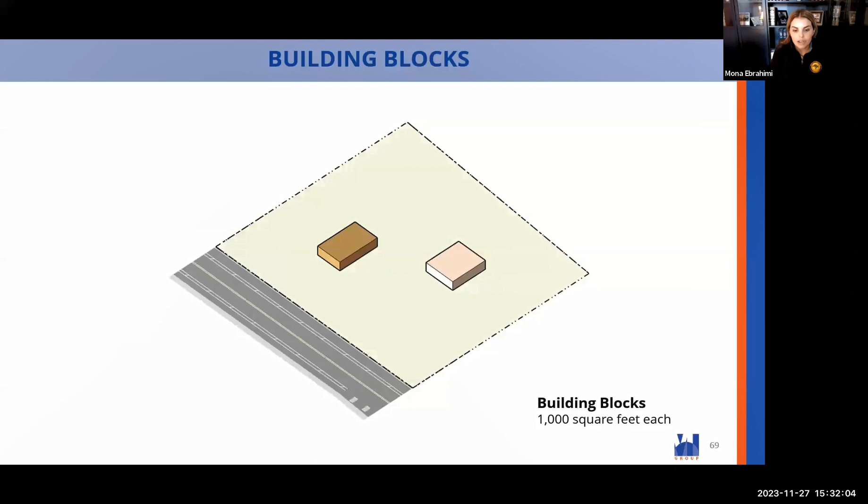So a couple of comments. Number one, your task today is to provide direction to staff to come up with some objective design standards. However, those objective design standards cannot be so onerous that they provide an unreasonable restraint on development. As an example, if you put 15 foot setbacks on every side and you can't actually build, that's not going to be upheld. The other thing, to Commissioner Polito's comment at the beginning of the meeting, trying to understand what your charge is, I want to draw everyone's attention back to the absolute need to come up with direction by the end of today's meeting so that staff can prepare those objective design criteria, because we have until January to adopt them.

And if we don't adopt them, we're subject to further penalties from HCD. The other thing that can happen is someone could submit a builder's remedy application - you don't have any objective design standards in place, so they're going to build whatever it is that they want. And the final point is that we really need to prevent exercising discretion on behalf of a developer as to what they may or may not be building. That's really not up to us to determine, and whether they actually build because of financial feasibility is really a question for another day, it's really their issue.

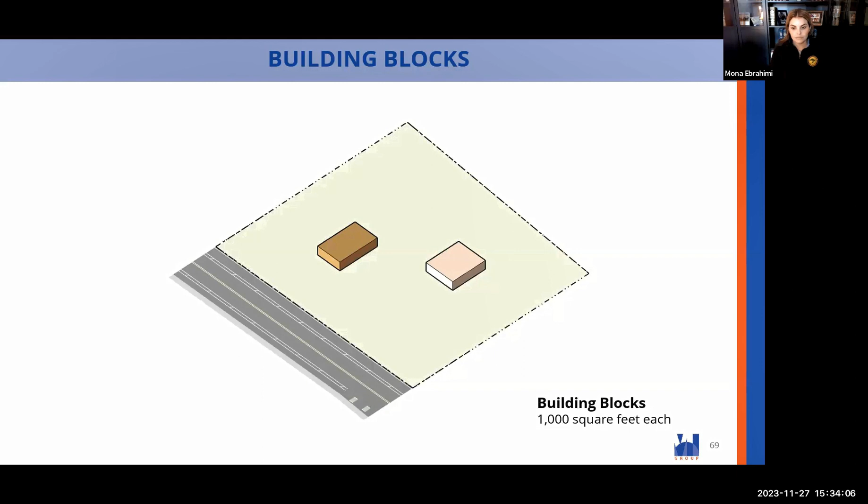So using these building blocks, we started to look at ways that they could be formulated in the big house model, looking at one big building that might have multiple ground floor entries to different units on any side, on the road side, on the back side.

In the upper left, you'll see your existing single family home standards. You do not presently have a coverage standard for residential, so that's why that's blank. In the red box on the bottom right, that changes every image because it's trying to show what this model shows. Again, this is not architecture, it's just a development yield.

So here's 13 units of 1,000 square feet each within the R1 setbacks, actually. It comes in within your R1 height limit. It has an 11% coverage, and the FAR clearly is larger than you presently allow for single family.

So for each of these models, and I have 4, we just show the model, the blocks, and then we say, well, what would happen if you put a roof on it and you tried to utilize dormers on the top floor to perhaps make the floor not as tall and allow those upper units to peek out through dormers that lift up from the roof.

Here's where you can start to see that there's multiple entries. It wouldn't be like an apartment building with one single entry to a double loaded corridor. It's supposed to look like a larger house and have these multiple units in different roof forms and such.

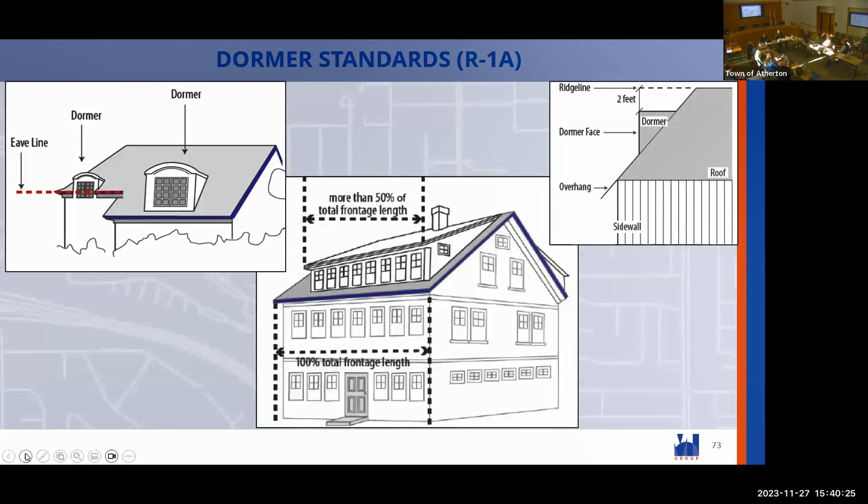Next, Anthony. So here's just an L-shaped building. Again, we're using 13 units. Base zoning would allow for 10, but we thought maybe they'll come in with a density bonus and have a few more, so we looked at how we could fit 13.

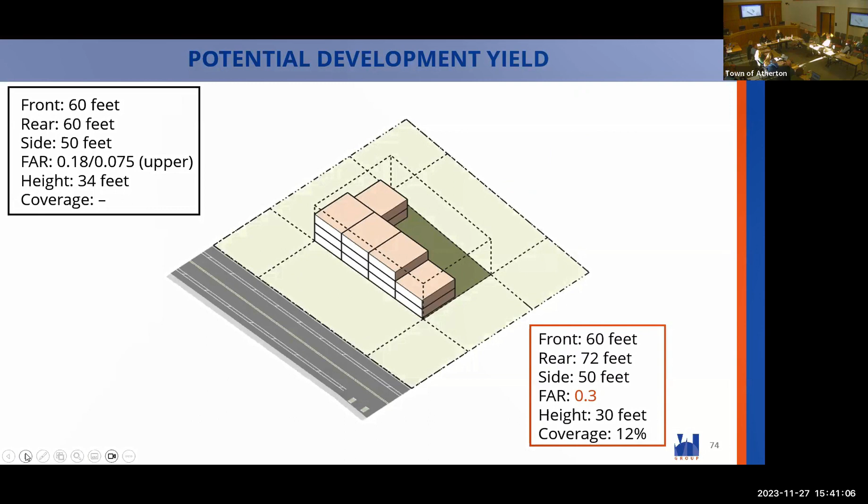If you start to put some roofing on it next, you can start to see some shapes and 2- and 3-story forms, using the dormers to indicate the type of room that might be up there. Maybe bedrooms are the smaller dormers, public rooms are the larger dormers. Again, it's just a way of getting the top floor to sit a little lower by using the attic space to bring out some of the livable space.

Multiple ground floor entries. It's envisioned that these are probably built without elevators, so they're trying to go into stair corridors and things. Again, it's not architecture, but we were trying to think feasibility.

The coverage is only 12% before we put garages on it, and the height comes in under your current R1A at 30 feet.

Next, just to be clear on that: the floor area ratio has to do with the square footage in the unit itself, but this does take into account the footprint that would be standard for a single family home. So it's in the same footprint area, but there's just more stuff in that square foot area.

So I have a question. In the previous one, all the houses shown are 13 1,000-square-foot blocks. This one also shows 13 blocks but you moved one behind the other. Does that work the same way? The side setback is the same as we used before.

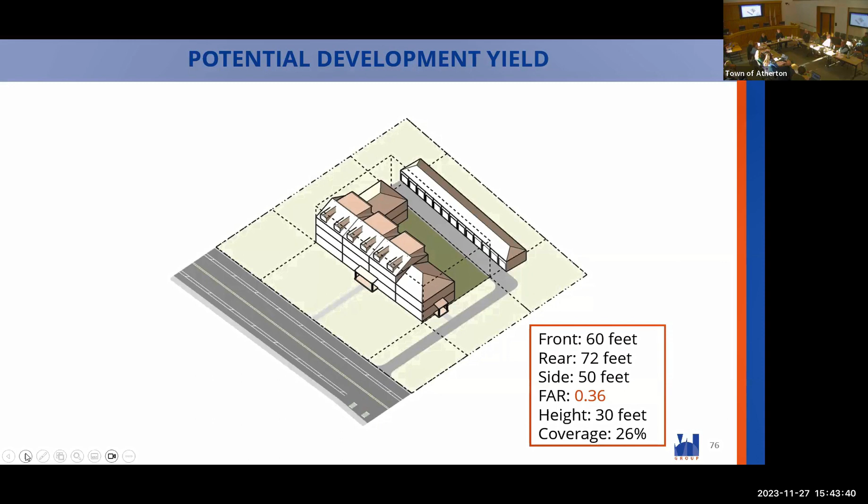Is it true that we can only require one parking spot per unit? We can't require more than that? What you're referring to has to deal with the density bonus program, for parking.

So then we played a little bit with the next two models, basically the same, but one orients towards the rear of the property.

Here again, 13 units. What page are you on? Page 13. There's light gray on the corner, it says page. They might have different numbers on printing. Okay, page 13, page 10, that one's number 10.

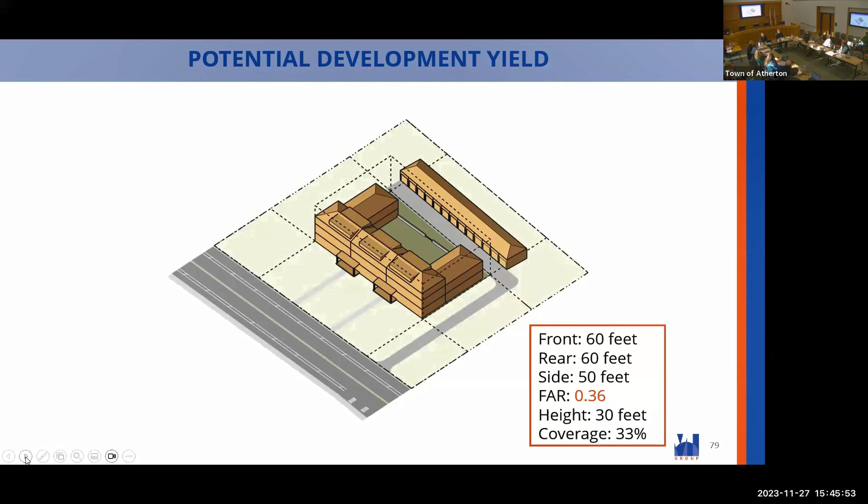Adding the garage and the asphalt changes the coverage and the FAR a little bit. So here's just taking that same model and facing the street.

So it looks simple, it's the same model, but this would be really something nice to hear from you folks about: what do you think about the public entries to multiple units facing the street, or should they not be seen from the street and face parking behind instead? That would be a good direction to get.

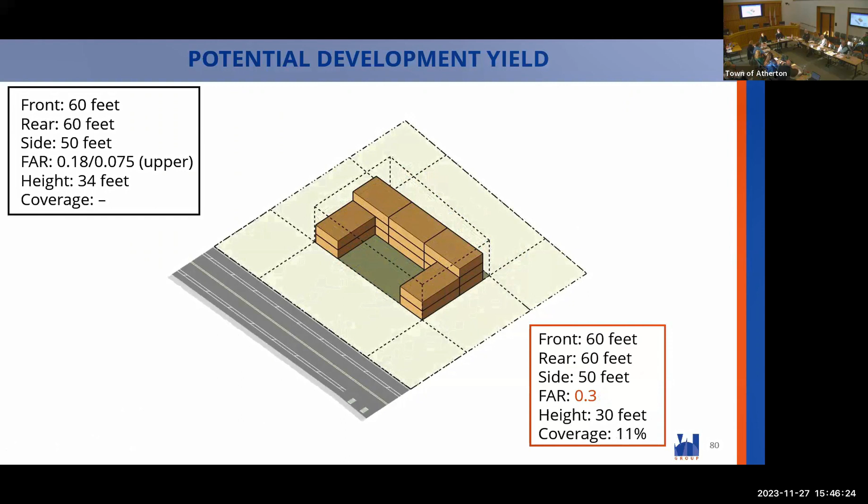So here it is with the courtyard providing something to the street environment.

So you can see we've drawn a little wall, it's an enclosed courtyard. You can imagine there might be stairways up to upper level units. Again, using the dormers to try to make the roofs not look so oppressive, and using roof forms again to make the building look a little smaller, a little shorter.

My comment is that if the garage is in the back, it would be a little more difficult for access. You park your car, but if the entrance is off the front of the structure instead of the back... Just so you know, not all of the entries would be off the courtyard, some would be towards the rear property line. But that's a good point: somebody parks their car, but their front door is off the courtyard, they have to walk around the building, get into the courtyard and go up.

Why didn't we show the parking in front, in the 60-foot setback, or on the sides? It could be done, but we also tend to not want to squeeze parking in front of the building so that it still feels like homes rather than a parking lot. I'm just thinking a lot of apartment complexes do that, so that's all I was wondering.

Again, the idea is to keep it away from backyard neighbors and the headlights as people come in, since we've even had complaints in single family homes about headlights bugging people behind them. So if it goes back to screening, you put a green screen in front and people don't even know it's a garage. It's just an idea.

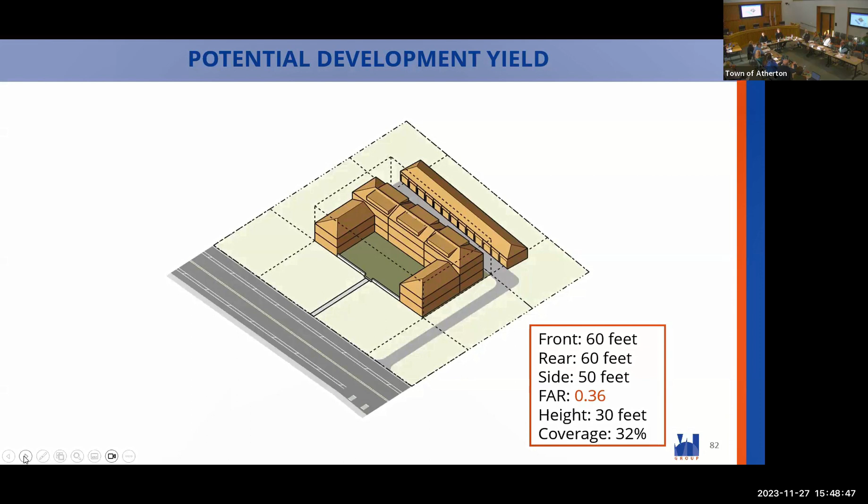If you want to give us direction to try to lower the FAR, you could have a graduated system like you currently have with your R1A. For those who don't remember, you have an 18% total FAR and only 7.5% can be above the first floor.

So if you have a 3-story house, 7.5 for both of those upper floors. I'm pointing out that it's not just the gross FAR that's exceeded.

We're blowing away the second and third story FAR, and that could be disruptive. But the height is still the maximum height, right? Right, the height fits within, but what you're bringing up, Commissioner Polito, is really a good point for what Brittany and the town attorney were saying earlier. If you guys give us direction on that, we'll go away happy.

That would be great to hear, that we need a graduated FAR system. That's all you have to say. We'll go ahead and write the standard. You don't have to write it, but just knowing that that's important would be helpful. Just to be clear, it's not because we're advocates for that, it's because we're advocates for feedback.

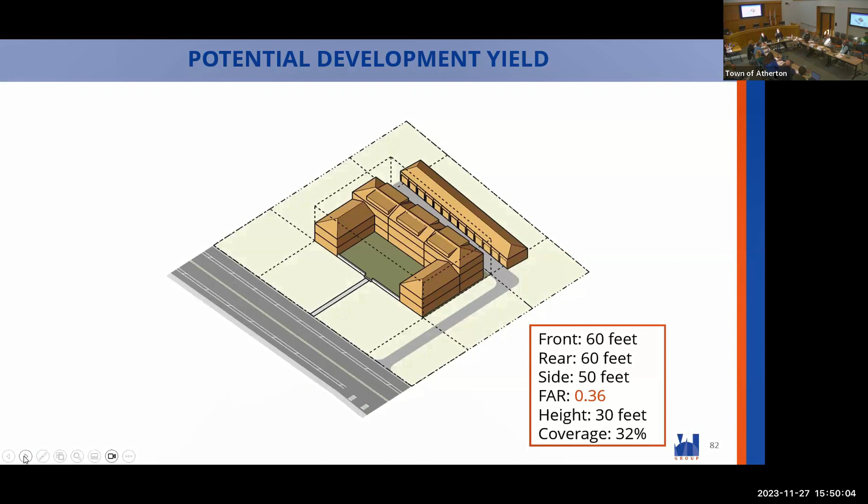Okay, good clarification. Next, so these are the images that I was requested to bring. And I did, but I want to show you some other things that Poe and I developed.

One of the things that I really heard from people at the second workshop was that for us to go away and develop objective design standards so that the windows look really good, or so that somebody has a really nice carved wood door, isn't as important as privacy. What seemed to really stick out, and I think Commissioner Polito, you might have even said it at the meeting, is that people really want to know how can these mitigate potential privacy intrusions. So we went away and started working on some design things to show you next.

So we looked at these issues. How can these components, these 4 bullet points, be used to alleviate or mitigate potential intrusion of privacy?

Extend the current limit on the height of a wall, fence, or landscape screening. Today I got here early and I met your arborist - I keep calling her a botanist, your town arborist. I hadn't even looked at 17.5 in your zoning code about landscape screening. So she pointed us to that. We can go beyond that if we get some direction about using screening in a way to help, and so augment what you already have in your code.

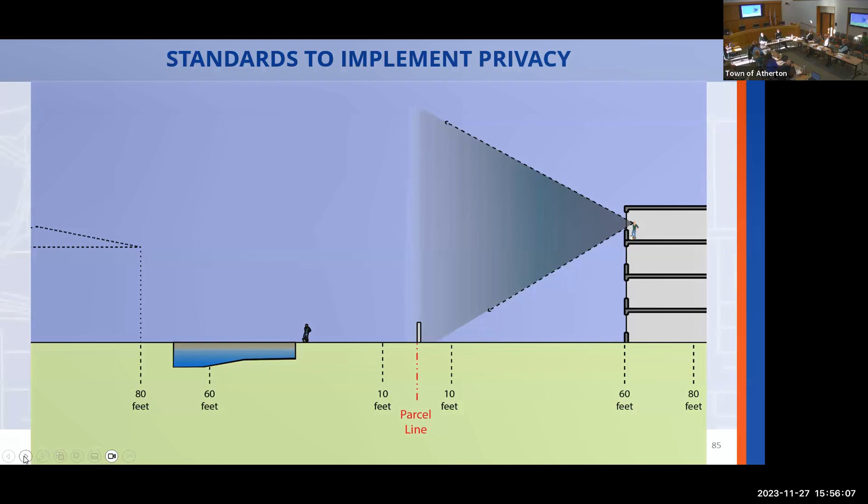So the first one on the next slide is: let's say we extend and say you can build a wall up to 10 feet high. You can see that regardless of how far away that person is, they can still see basically to the pool. It's a long distance, 80 to 100 feet from that person's window.

We've drawn a three-story building here on the right, but you can see the wall is a nice gesture, though it doesn't really block that much of the backyard to the left. The next is landscape screening.

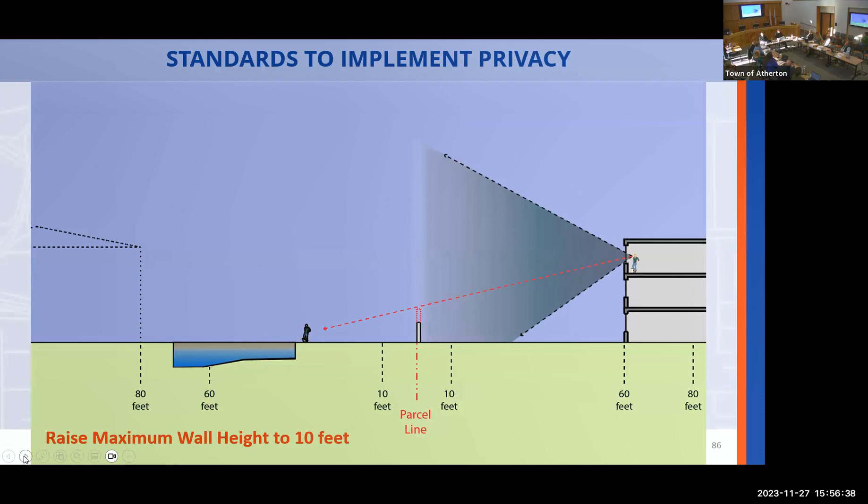Next slide. I think this might be the biggest bang for your buck. We talked again to the town arborist today about this. Perhaps you could direct us to pursue this path, and we could write a standard that says every 25 feet on center, the developer must provide a 72-inch box tree, which according to the arborist, by 5 years is approximately 25 feet high.

Now, granted, it's a tree, and even if you have a tree next to it, there are going to be places where you can probably look around. It's not like an opaque wall, but it's nice, and you're already known for your tree cover anyway.

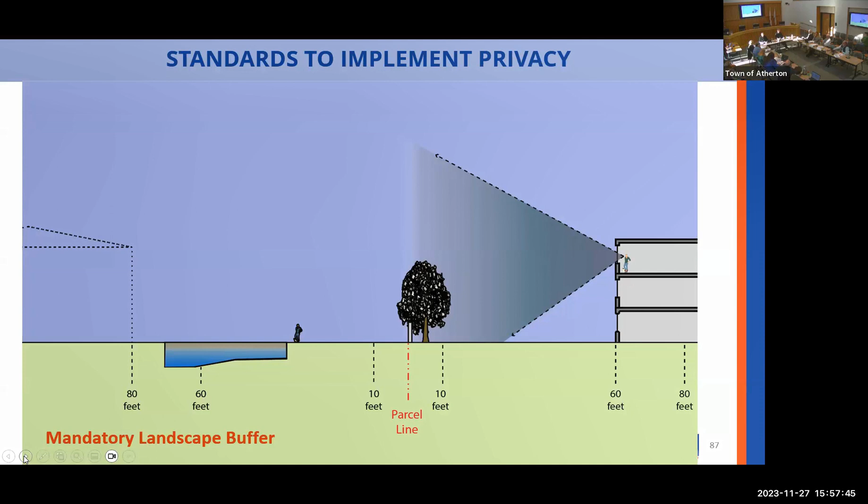Presently, you have a lot of trees on all of those sites, and the arborist is used to looking at plans that have existing foliage and planned foliage. What do you have there now? What are you going to add? Then the arborist is able to make a decision as to whether the screening is going to meet the desired goal.

It's something we already have codified in our requirements: extensive and robust landscape screening on your perimeters with neighbors. Doesn't matter how it's implemented. What I'm suggesting is we might want to augment 17.5. It has to be 5 feet within 5 years, which the individual landowner has to do, but that doesn't help anybody monitor it for the next 4 years. So, what page are you on?

I don't have the same handout as you. At 22? That's right, that's where I was, okay.

The next piece is looking at what happens if you mandate a taller, higher sill height for upper floor windows. You wouldn't do this on every window on every wall, but perhaps we would write the standard to say for walls facing directly onto a single family parcel, or a parcel of less density, the window sill height must be a minimum height.

So here you can see we haven't changed the upper limit of the view, but clearly the bottom is hindered a little bit, so it narrows the person's view cone, if you will.

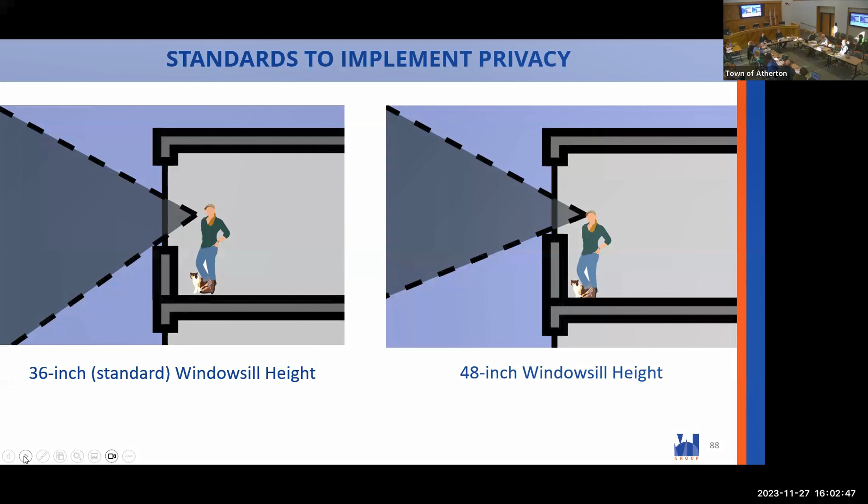Next. Here's what—you can't really tell, but the view out of this higher sill height has been hampered a little bit. But again, by the time you get to the wall, you're already at 65 feet, so it just shows how it is.

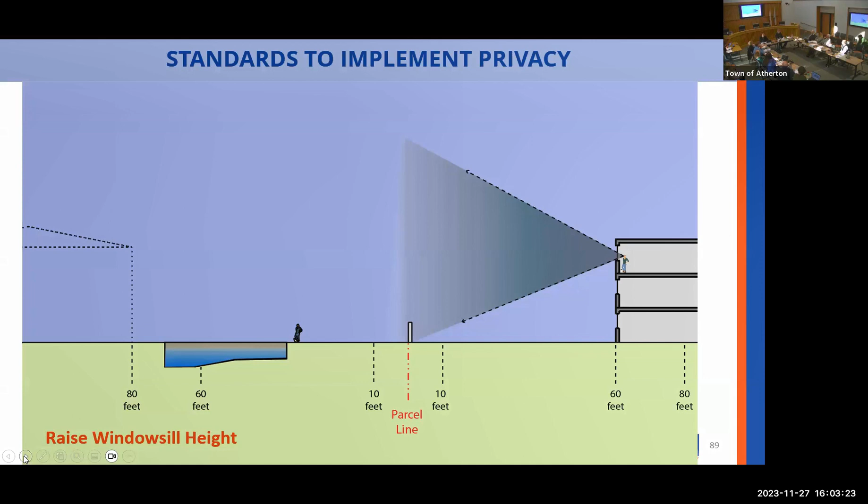The thing I'm first drawn to about this is I would want to look into the feasibility of a developer building something where the 1st and 2nd floor have a certain floor plate, and then suddenly on the 3rd floor they've lost 20 feet. Can they still do a series of apartments and still have vertical circulation?

So again, it's just an idea of taking some part of the building and going beyond the setback that the rest of the building has. Also, this type of format makes it important to have regulations around not having a deck, because a deck—no, you can't totally do the deck.

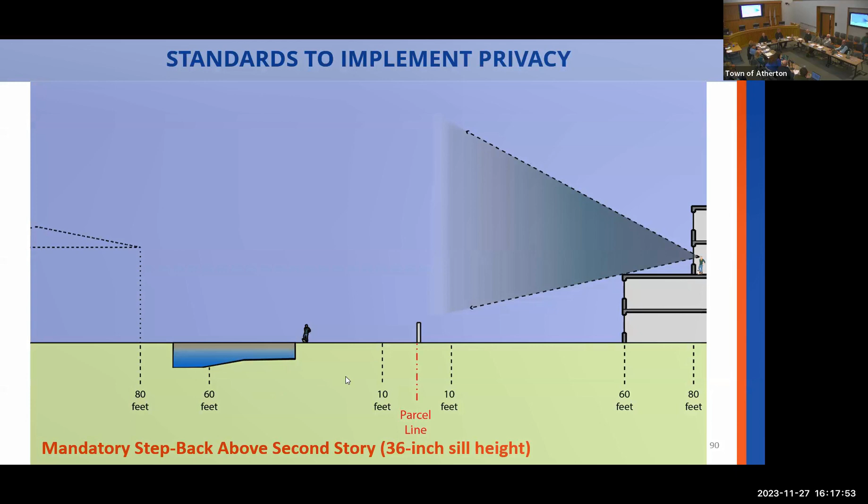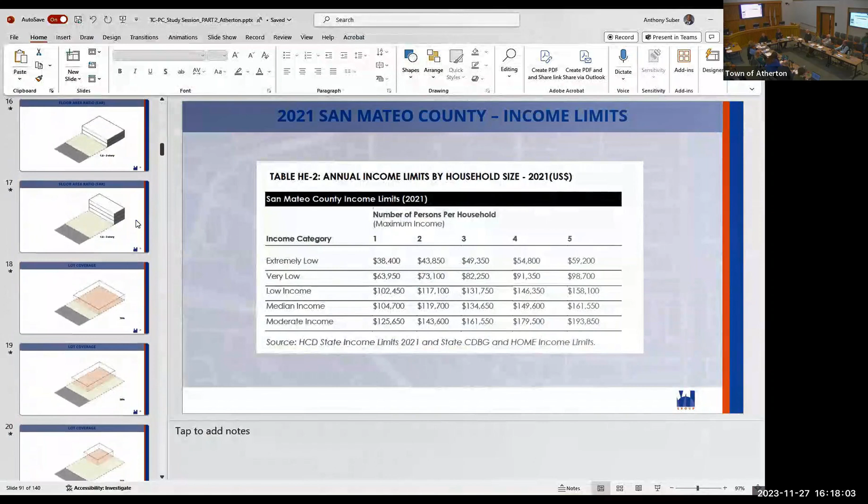Well, you're missing screening, side yard screening. Deck standards, yeah. Well, it's got porch and entry. Even if you think it's already covered up there, go ahead and share it with us, because redundancy at this point is okay.

So one of the questions that I have—go ahead, Rick. No, okay, I was just trying to figure out the process.

Well, I agree that landscape screening should be up there, it's important. I think the screening should be evergreen—I don't think it should be required to be trees, but it should be required to grow to a certain minimum height within a certain period of time. There's landscape screening that isn't trees, like laurel and other things that grow 40 feet high, and they grow very fast. I had a neighbor who built a unit 10 feet from my wall, a back wall, which complies with an accessory building standard, and he put in screening that looked horrible, but within 3 years it filled in. So I think screening is extremely important.

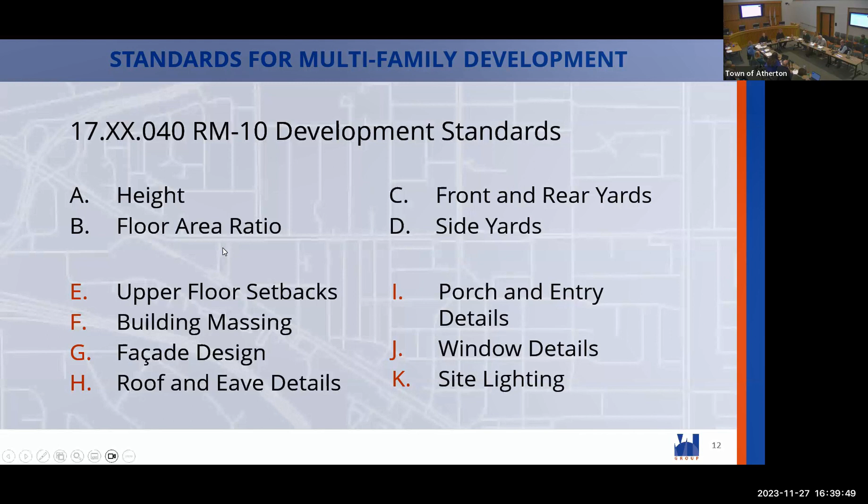Anthony, I have a slide for you to bring up because we're moving on to question number 3. Questions 1 and 2 were effectively, did we catch all of the things that we need to look at, and if not, what are those? Question number 3 is slide 61.

So did you add drainage on that? I mean, as we can come back to that, okay. Because I have something about this - I think I have two things.

Having this many heat pumps on one lot is potentially a noise problem. I wanted to flag that both the City of Palo Alto and Silicon Valley Clean Energy are doing a noise study about heat pumps. There are certain heat pumps - I have 2 on my lot and they're silent. There's different technologies and decibel levels we could require as part of this development. I would love for the town to watch our neighbors, as they're ahead of us doing that research, because if you have 25 silent heat pumps, who cares? If there's 25 loud ones, that's a big problem.

Also, as it relates to setbacks, I'm wondering, can we do different setbacks for different neighborhoods? I think on the Ravenswood lot, the neighbors have indicated they would rather have a smaller front setback. I think the Bay Road neighbors have done the same. I don't know that Oakwood would want that. So I'm wondering, are we allowed to vary our setbacks by zones or regions? It's not spot zoning, it's more reflecting the neighborhood. I'm just curious if that's something we can consider.

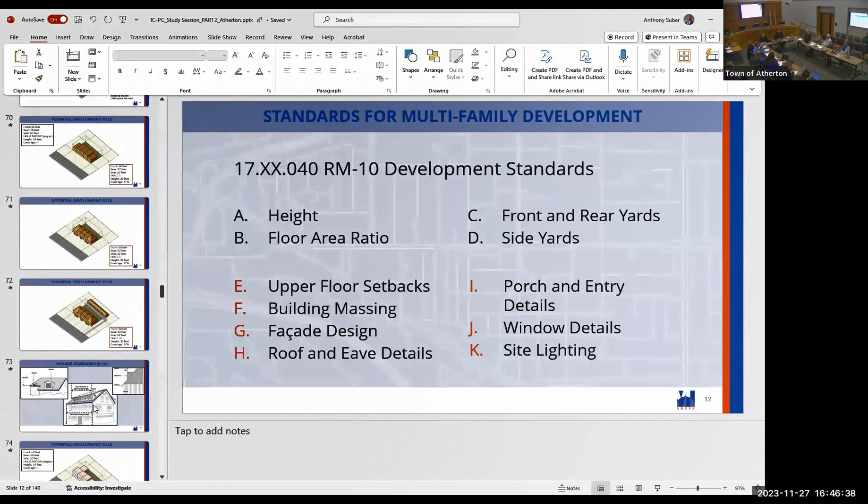One thing we haven't addressed is common space use, like a pool. I think we should prohibit a pool from these multifamily units. I agree, and sport courts too. You mean pickleball?

I think Eric's comments about really looking at putting the garage on the front are important. I want to see some images of what that looks like. I'm concerned people will feel it's totally out of character for Atherton, since nobody has that here.

They're allowed to have it down in Menlo Park on ECR, but as Tom brought up, the whole area is paved there, because it has to be big enough for cars to go in and out, plus big enough for the fire truck to go in and turn around. So from the front of the driveway you have the apartments, and the whole area inside is paved. But if you put a garage in front and then have a 3-story building behind it, you're gonna have to pave back there anyway, because a fire truck has to get into it.

Right, and they're not gonna get into it over the garage, they have to be able to drive back there. So exactly, the common area has to be paved. That's what I'm saying.

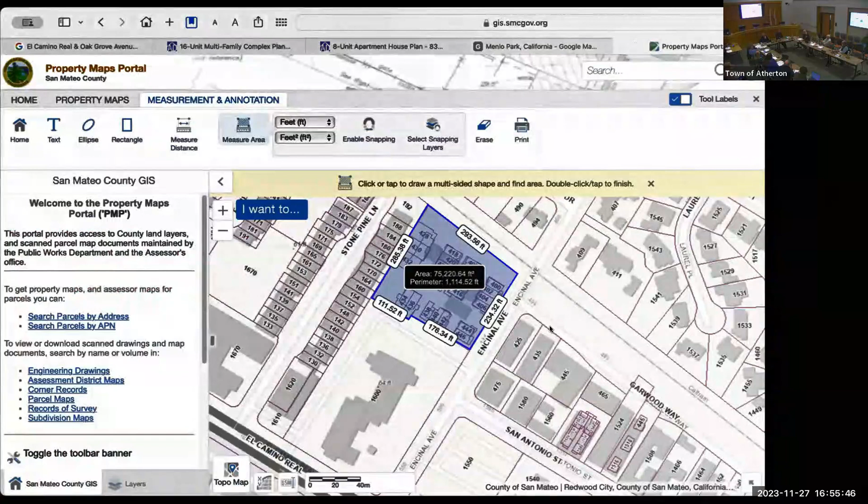On this particular development, it's important to note that the buildings closer to the street and interior to the site are 3 stories, while those at the back that adjoin the neighborhood are 2 stories. Each individual building is probably 4 to 6 units. If they're on one of the Bay Road sites, and the number is 14, 3 of those units are low income units, which could be a 2-story unit depending on how the windows are handled.

But the coverage—I mean, I think it's a beautiful project, and we know property values there were quite good, so it was a doable project. But the floor area ratio and the lot coverage is out of this world to get to 22 units on 2 acres.

I guess I have this feeling that to attempt to keep everybody happy, maybe 10 units per acre is the wrong number. Maybe we should be at 8, so our second floor setbacks in particular can be greater and we don't have to cover so much of the lot.

Well, the problem with that is the state bonus. Staff shows the state bonus is at 35%, and there's also a 20% option, but you can go up to 50%. So the issue is it's not really 10 units per acre, it's 15 units per acre.

I understand, but we get to 15 units per acre because we're zoning these places for 10 units an acre. I'm saying maybe that's the wrong starting point. So if it was 8, it would be 12 units.

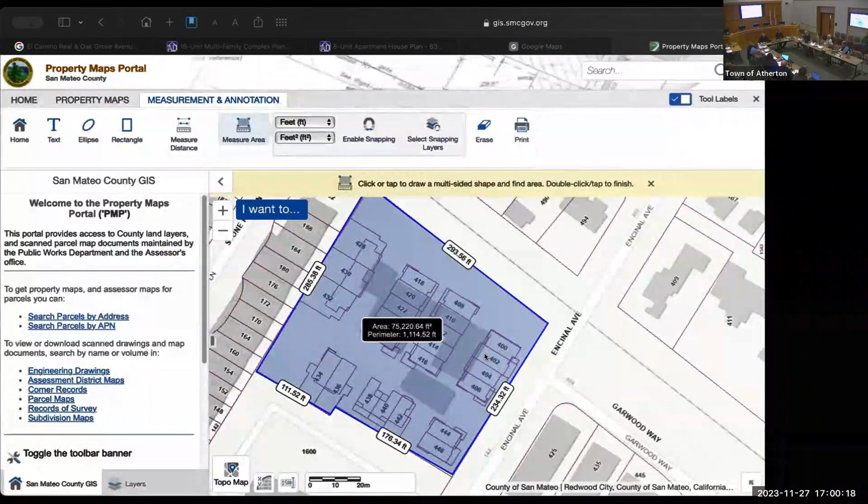So in that aerial photo, you see the two buildings in front with the drive aisle in between. I don't know how many units are in there, but if there were sort of 6 units on each side, that dimension is like 132 feet. On a 170-foot deep lot, like the Bay Road lots, you'd have basically 20-foot front and 20-foot back setbacks.

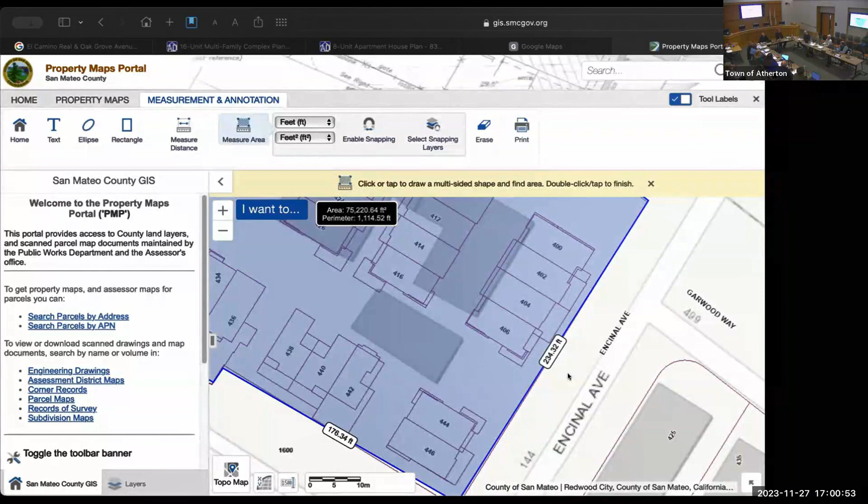And you need it for the trucks to get around, actually - it's all going to be paving for a fire truck to go around. This lot is 234 feet long along the frontage on Encinal, with 6 units there along with the drive aisle. The fire access depends a lot on how long their hoses are, and the fire marshal could give us guidance on that.

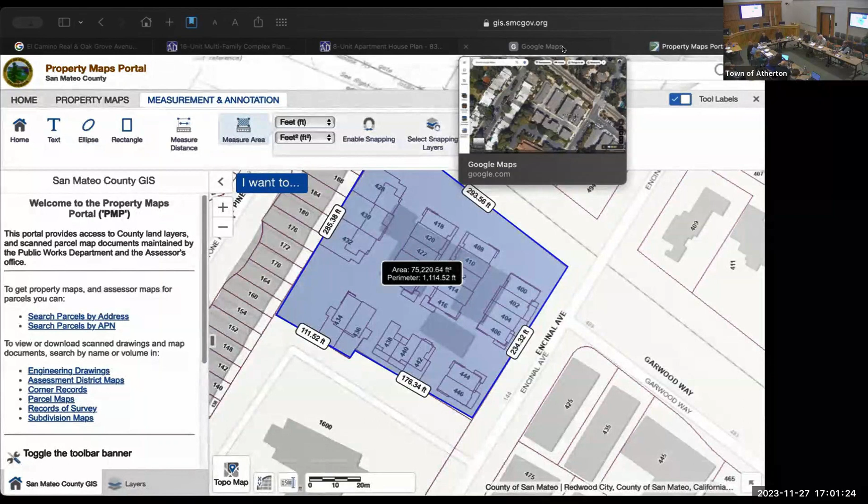If there's a nearby hydrant, the fire truck isn't gonna go in there. In that space, I don't believe there's really room for a fire truck to go in - towards the back there is, but that's more for trash pickup. And it's also the ladder truck - if they have to reach the third floor, they have to do it with a ladder truck. At this point most of the ones in the back are second floor, typically fine. We have to talk to the fire marshal and he'll give us guidance on what we can and can't do.

I agree, and it's a big development - you need a big space for the fire truck to be able to turn around. I just wanted to point out that in developments like this, typically you'll see those curbs all painted red - that's why there's no visitor parking, because the fire department has required that they be painted red so the truck can get right there. And that's in addition to whatever hose distances are required.

All right, so I have feedback based on this model. If we are looking at separate structures, I think it's a good idea what they did with having a lower height limit when it's closer to the fence line, restricted to 2 stories closer to the fence, but higher in the middle.

Given that our main goal is privacy, one of the images you showed was with those decks and the impact of having structure between the fence. I think that's a good idea, that's my feedback.

Stacy, I think that's kind of site specific because the Middle Plaza project along the train tracks has those 4-story, really tall units that Stanford built. As you come into the El Camino side, they're lower. So that's kind of site specific, yeah, so they're five. It depends there upon who's your backyard neighbor or who's your front yard neighbor.

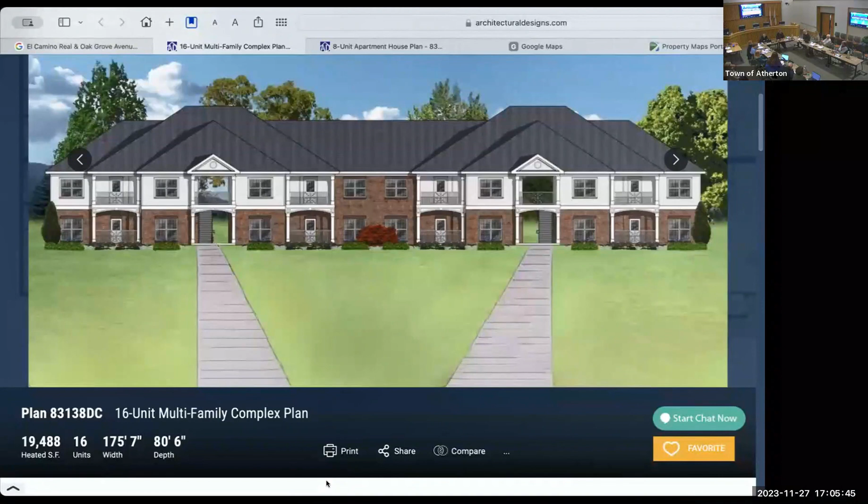We don't think this is what you really want, and instead we really would like this more distributed model. I think it's either or. Yeah, I don't think it can't be. I never felt that way. In the community meetings I went to, it seemed like this was one of the ways to address an approach that might be another approach that could fit the community along with the ones that were being proposed. So it was never like this was the only answer that I felt was going on in the public hearings.

So staff needs 2 sets of objective design standards then. Well, we need to have options. And what else? We're just starting this conversation. It feels like it's been ongoing, but that's because the meeting was continued. We got a little sidetracked, and that's okay. But this is really still the beginning of this effort.

Part of the reason that I'm asking to get so much feedback tonight is because, of course, we would love to go back to the community and get more information before we come back and ask you to adopt anything.

And if I could add, the RM10 will be its own chapter. RM20 is a whole different thing because you can't do the big house at 20 dwelling units per acre. And those are only on school sites presently, right? So we're on board to write 3 things, the RM10, RM20, and RM40, which will actually just be a piece of the RM20. And the RM20 and the RM40 are all for the PFS sites.

So Brittany, you said there was one more thing you wanted to go over. We've been talking about question number 3 already. That's okay. Is there anything else? Yeah, I have 3 more questions. Okay, so Anthony, can you pull up slide 54?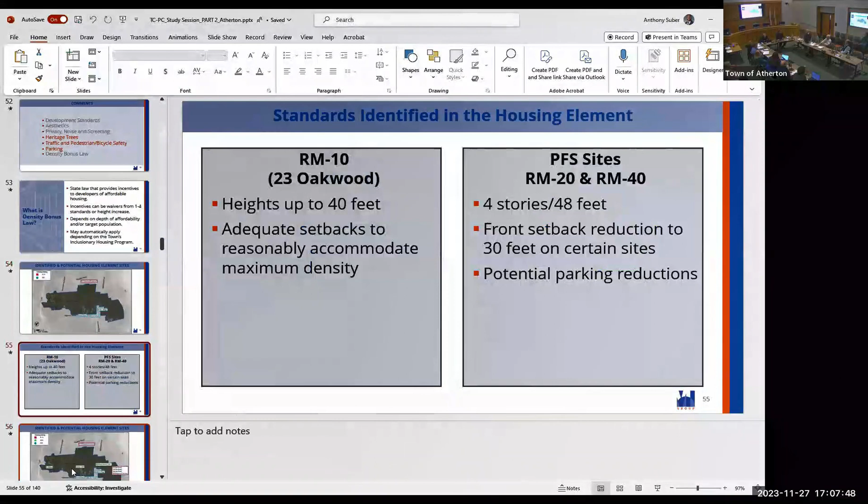Slide 55, right? So the first is the RM10, 23 Oakwood. That's really the focus of my question for you tonight. But also up here on the slide, I didn't change the slide, this is just what was presented previously, but it also gives them maybe some context for this conversation.

The PFS sites were RM20 and RM40, 4 stories, 48 feet, some front setback reductions, potential parking reductions. But my first question is, for 23 Oakwood, which was the only RM10 property listed in the housing element, the housing element says heights up to 40 feet and then adequate setbacks to reasonably accommodate maximum density. So the focus of this question is, do we want to depart from that and update the housing element when it comes back before you with other changes, or do you want us to stick with this?

More broadly for all RM10 lots, we've been talking about 3 stories. This is up to 40 feet, which we think accommodates 4 stories at 10 foot floor to ceiling height. So I think what it has to say is 3 stories and a max of 40 feet. It's the 'and,' not the 'or.'

But the other thing I'd say is that's fine if we're talking about the big house, because the big house will have a flat roof with a roof screen at the edge. But if we're talking about the townhouses, they may have a pitched roof all the way up, and I'm not sure you can get that pitched roof in 40 feet on a 3-story building.

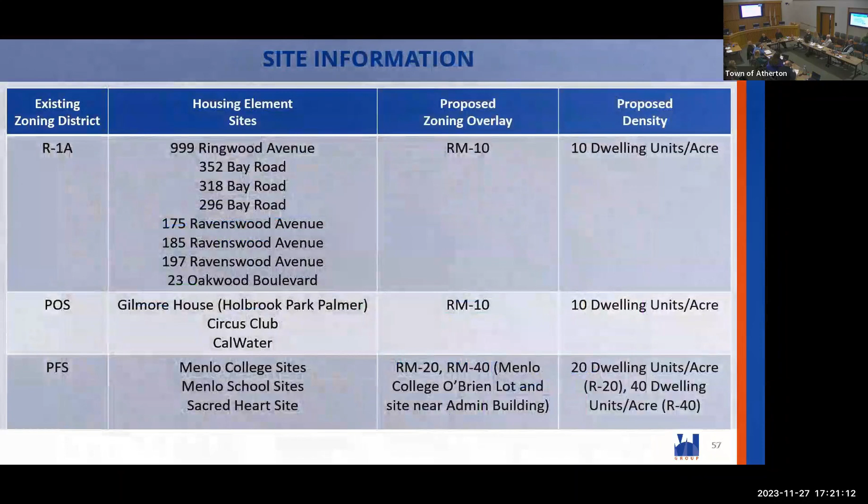So number six, similarly—and we can keep this slide up—Council has previously discussed multifamily development at public open space, POS, sites. Can you go to the map so we can see where the POS sites are? Perfect, so these are the sites outlined in green: Cal Water, Circus Club, Holbrook Palmer Park. Those are all being evaluated per the CEQA process right now.

The goal is to look at preserving existing open space while enabling a small number of units as infill development. Should the large home typology guide building massing and site design for these properties, or should there be less restriction? Say the question again—I think more restrictions. Are we applying the large family home typology to these sites?

Oh, the green ones—super simplify it. No, I'll say no. No. Okay, I mean, that's not what they're demanding. Not what they're looking to do. If somebody said they wanted to do that, I wouldn't reject it out of hand, but I don't think we would mandate or require it.

Right, no. These sites already allow for caretaker units, so we can look at what standards would apply to them, again with the spirit of only really promoting infill development and seeing what future development might look like here. But it's been very clear that any development allowed through the housing element or code changes, if it moves forward, would be on areas already developed, like parking lots.

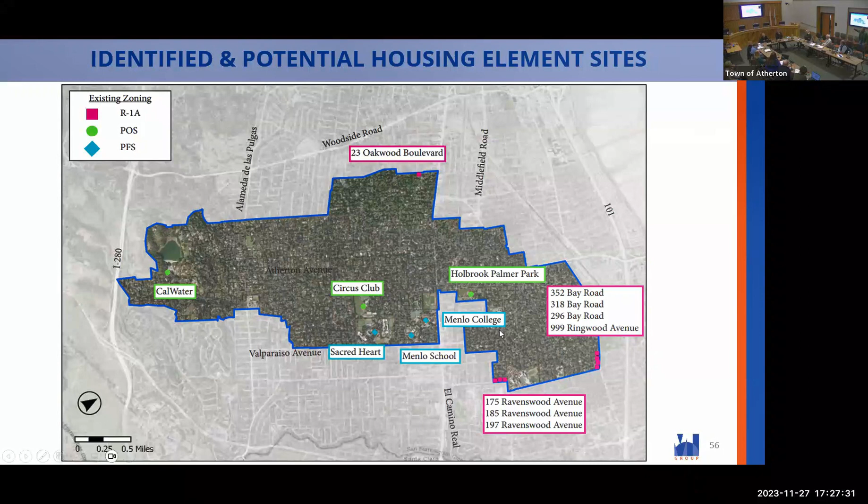Hi, David Rada, 23 Oakwood Boulevard. I just want to say I'm very encouraged by the meeting I watched just now. We still have this crazy lot that's 135 feet long and 500 feet long and 135 feet wide. So the setbacks don't quite work with the big house, but they will work with townhouses and individual single family houses. The 427-foot side has got an 8-foot fence already because it's Redwood City on the other side of that fence. The setbacks on that side, the Sargent House, I'm sure you all know the word Sargent, is 6 feet away from that fence. So I think what we did in the last plot plan is move everything to that side and left the other side open with the drive, so it's at least 20 feet between that and the fence and the Curry's house and the other house. So all this kind of works. It looks good, and I think you guys have a job that I know I wouldn't want because it's going to be hard to win.